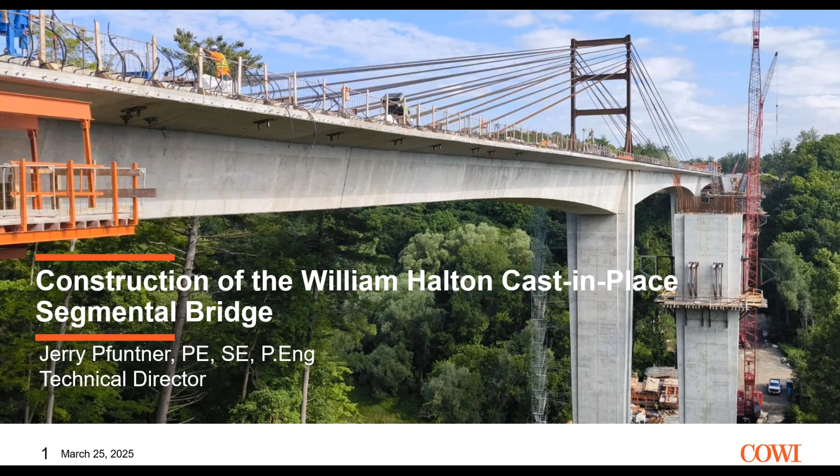All right, perfect. This afternoon we're going to talk about the construction of the William Halton cast-in-place segmental bridge. As you can see from the photo there, this is not your average cast-in-place segmental, with the temporary works that we have here. We'll discuss that over the presentation.

A little bit about the project. It's located in Oakville, Ontario, Canada, near Toronto, which is a suburb of that. It's part of the William Halton Parkway Extension Project, which is going to be completed in late 2025 this year. There are two new bridges over the 16-mile creek that you see below and to the left. It's got two lanes of traffic and pedestrian walkways, and it's going to help ease traffic in that rapidly growing area in Oakville, which is very nice.

The owner is the Halton region. The engineer of record for this structure is WSP Canada. The contractor that we've been working with great is Bot Construction, and COWI is the construction engineer on this project.

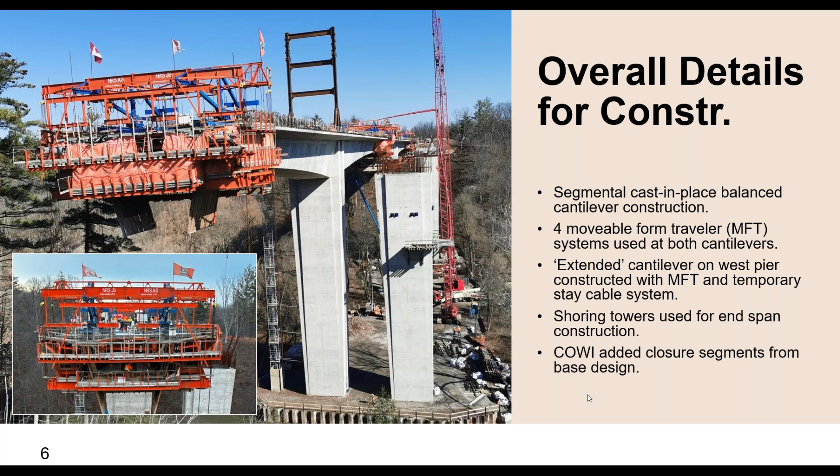Next we'll spend a couple slides talking about the construction methodology. Most of it was pretty standard cast-in-place segmental balanced cantilever. We have two pairs, or four travelers, one pair on each cantilever. We did have an extended cantilever on the west pier, which we'll be talking about extensively here, and shoring towers were used for the end span construction as is typical. We also added some closure segments from the base design to assist us with closing up and making our geometry adjustments right at the end of each cantilever.

So our sequence, pretty typical: pier tables were constructed first, and then we progressed on to the cantilever segments. On each cantilever, we closed up the midspan of the main span first, and then closed on to the backspan, and then we had the extended cantilever that you see here in orange, and then closed up with a closure segment onto the pier segment, the expansion segment there at the west abutment.

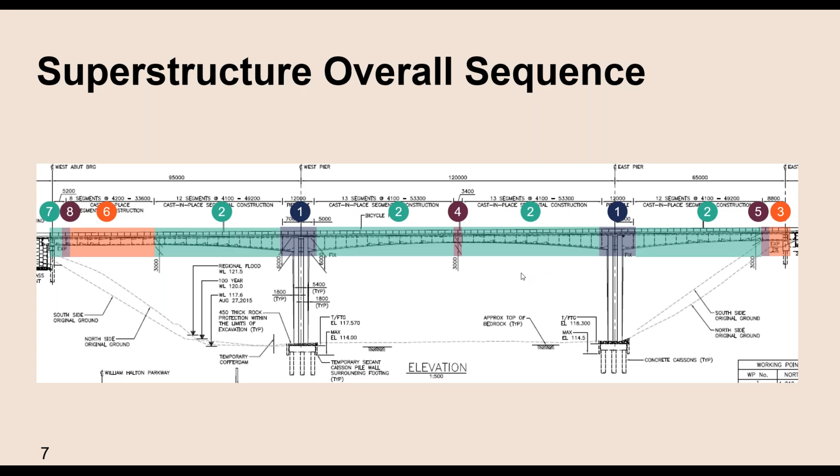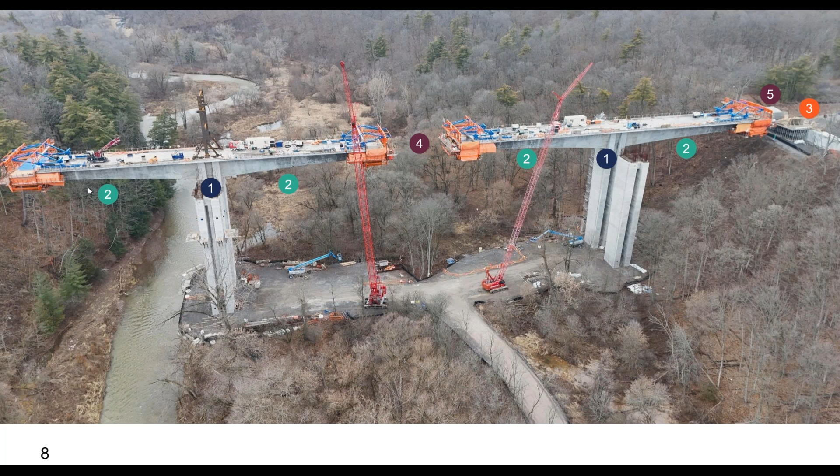This photograph just kind of highlights those different aspects of it. You can see access was not bad down below, being able to put cranes within an area. This pier ideally would have been located right where this creek is, in order to have a little bit better span distribution, but due to environmental restrictions it's not. So that's why we're talking about that extended cantilever that was required to get over here to the west abutment for the project.

Substructure was fairly typical. One thing we liked was seeing the twin pier columns that help with strength, but also with geometry control. It gives us a very stable pier table system to erect without a lot of movement of the substructure during cantilever erection, keeping it very stable as we progressed outward.

You can see they were integral piers at the top end of the pier table, with a pretty extensive formwork system for the pier table construction itself. That leads into the pier tables, which are nice and long to provide a platform for our form travelers, with extensive diaphragms as you typically would see, matching up to the twin pier columns supporting them in the substructure.

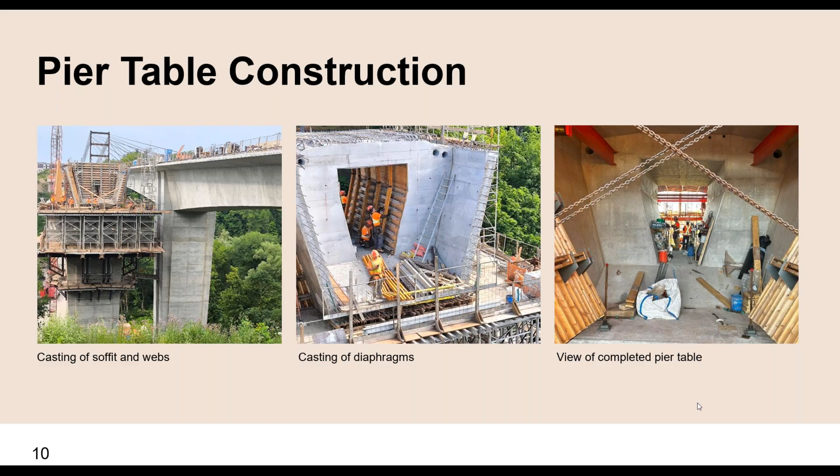Typical segments, our cycle was a little different than you would normally see. Typically you have a cantilever tendon for each segment, so from the pier table you'd stress a tendon to the first segment and then launch the traveler. Whereas in this configuration, the post-tensioning was one cantilever tendon for each pair of segments. That's doable, but it's a little slower for the erection cycle, since you have to wait for both segments to be cast and then stress the tendons before moving forward.

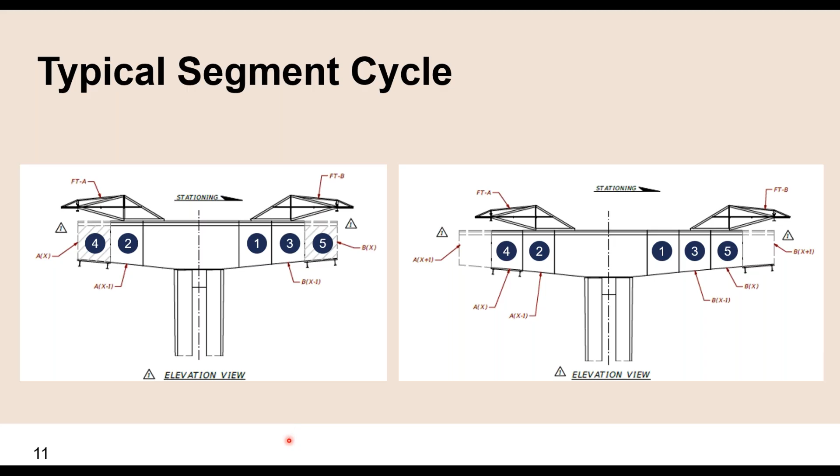Our typical cycle was to launch forward, set up the formwork as normal, do early morning geometry control, then set up and place the rebar, post-tensioning, and all those things typical of our segments, then cast the concrete once completed, and screed to the proper elevation through the segment.

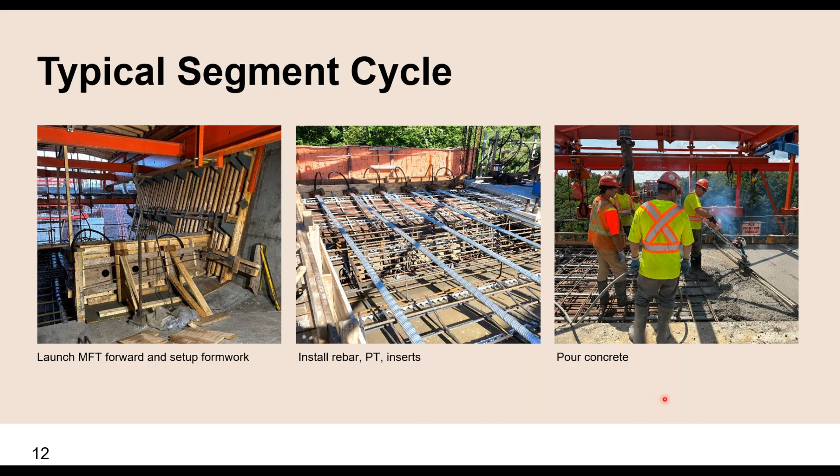The extended cantilever is where this project starts to get interesting. In order to have typical balanced cantilever construction with cantilever tendons all the way through to the midspan pour, to extend the cantilever the designer chose not to have cantilever post-tensioning integrated into the segment.

So beyond the typical balanced cantilever segments, we have no cantilever post-tensioning. All of the support for those additional segments is provided by this temporary stay system. It really acts as external post-tensioning, almost like a temporary extradosed bridge, in the way they actually performed and behaved.

By anchoring back and extending the tendons way above the level of the deck, we got the benefit of added eccentricity and support to go way beyond the typical range for balanced cantilever segments, anchoring them back into the completed backspan for the stay cable anchorage.

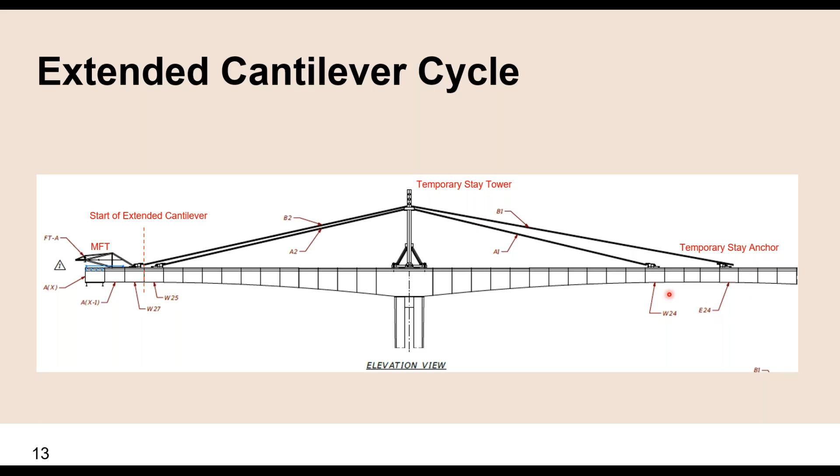This cycle was a little different. We were doing unidirectional form traveler construction. Once we got beyond there, we closed the backspan and the main span cantilever, which allowed us to complete the temporary tower and begin anchoring the stays into the backspan and main span, then anchoring them forward right behind the form traveler as we progressed onto that extended cantilever.

The anchorages, the boxes themselves, are at the beginning of each newly cast segment, so we end up adding some external PT bars above the deck level, mainly for shear lag effects for that segment. The anchor box was close to the edge so we'd provide some pre-compression close to where that anchorage zone was with this additional external post-tensioning.

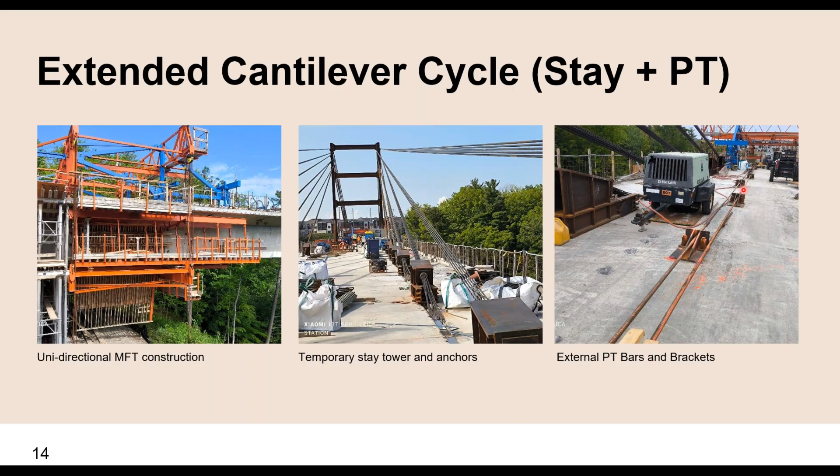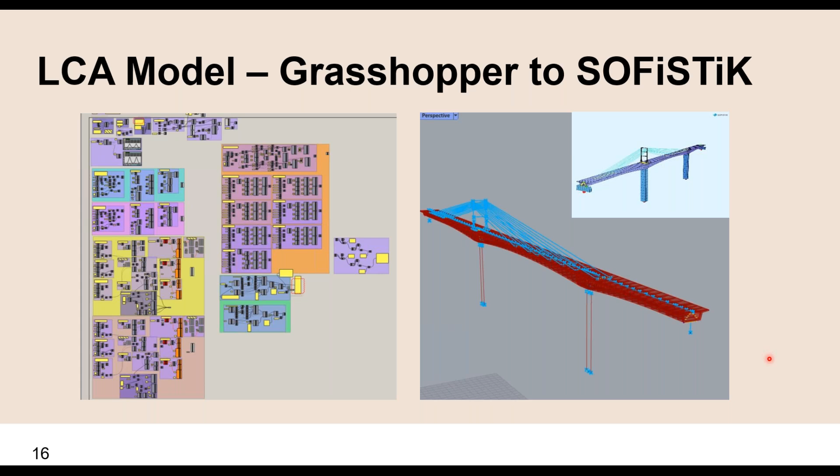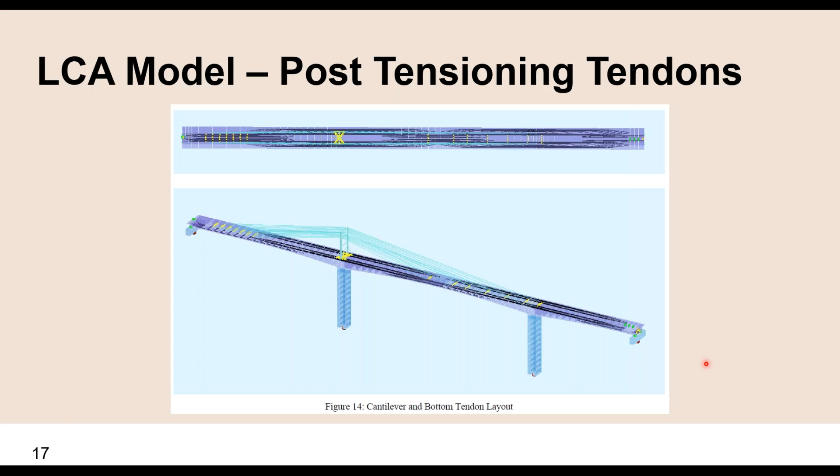Here you can see a good view of the varied post-tensioning systems within this structure. We have the typical cantilever tendons, our continuity tendons in the positive moment regions, and distinctly you'll see the cantilever tendons end right at the end of the balanced cantilever unit, with no cantilever tendons beyond this. We're strictly relying on the temporary extradosed cables to provide that support and those forces for the extended cantilever throughout construction.

In Canada, the CSA S6 is the predominant code that's required, but it doesn't directly address most of concrete segmental construction. So it's a blend of the Canadian CSA S6 code and also AASHTO, which they reference into their specifications for this project. We used a combination of AASHTO construction load combinations and the Canadian ones, incorporating design values and different loadings from AASHTO for things like construction equipment, wind uplift, and differential effects, where the Canadian code was silent. We had to do a few extra checks to make sure we satisfied both requirements on this project.

Our construction staging was set up to meet the requirements for geometry control and all the critical activities during cantilever construction.

We did make a few modifications. Some of the equipment, the traveler, was a little heavier than what was assumed in the design, so there were modifications for additional shear capacity required near the piers. We increased the top slab longitudinal rebar in the negative moment region, and we increased the top slab beyond where the stay cables were.

A lot of that was due to the fact that, as construction engineers working up in Canada, we considered that with the weather conditions there, we were not going to have bonded post-tensioning at all times. So we made sure we had the proper amount of additional reinforcement to make up for the fact that we couldn't count on additional stress gain in the cantilever tendons, because they were acting almost like external tendons. We also had the increase in loads during construction, and those shear lag effects I was mentioning earlier.

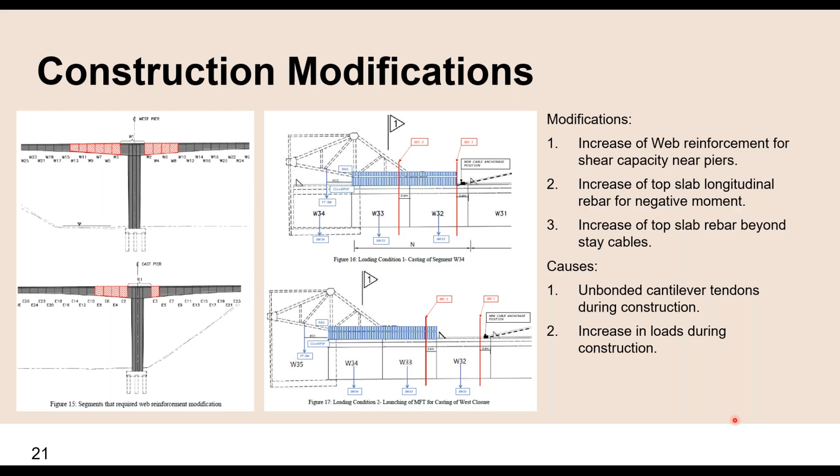For the temporary stays, we used nonlinear stay cable analysis that we can do within Sofistik. We generated our cable axial forces as part of the design in order to balance that extended cantilever. We were also looking at the negative moment region, the top slab stresses due to this negative bending, but actually the stay cables in certain stages would create some tensile zones in the bottom as well. So we were managing that back and forth, determining the axial force required for the temporary cables.

In the end, they were performing much like post-tensioning tendons. We were able to stress them to force, and they held their force, largely because the box girder section has a pretty stiff moment of inertia and stiffness associated with it.

So we didn't have the same concerns that you would have with a cable stay bridge, where we have a much more flexible structure. This one behaved very well as a bending element, and we were consistently able to generate these. We did end up stressing these up to 70%.

We were comfortable with that, given that the deflections during cantilever construction were small, and there wasn't much change in the work points between where the cables were during all phases of construction.

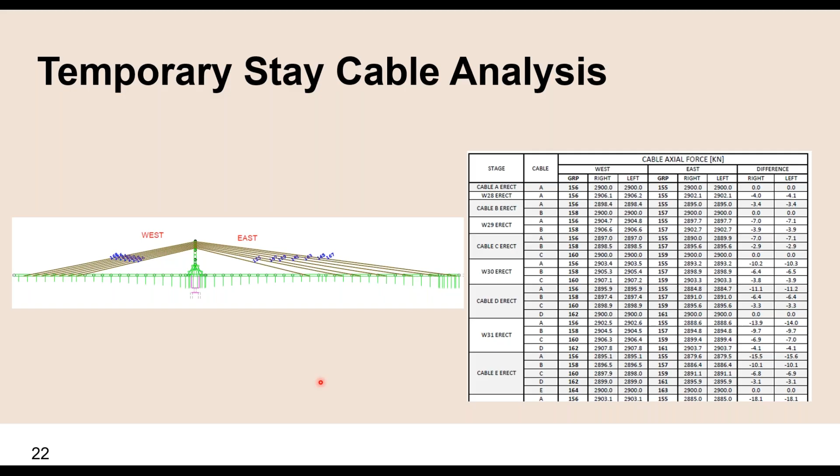Camber is where you can begin to see some pretty good differences between the traditional balanced cantilever and the extended cantilever. In regions where we were doing true balanced cantilever construction, the cambers were fairly consistent, what you'd normally see for a bridge of this size and magnitude. But when we get out to the extended cantilever, that's where you really see an increase in the bending.

This region with the extended cantilever is a constant depth box girder, and these deformations got to be pretty significant within the cambers themselves, even with the temporary external stay cables working within them. So we were dealing with some bigger numbers than we're typically seeing, and we'll discuss later the geometry and issues we had with keeping that all together on this project.

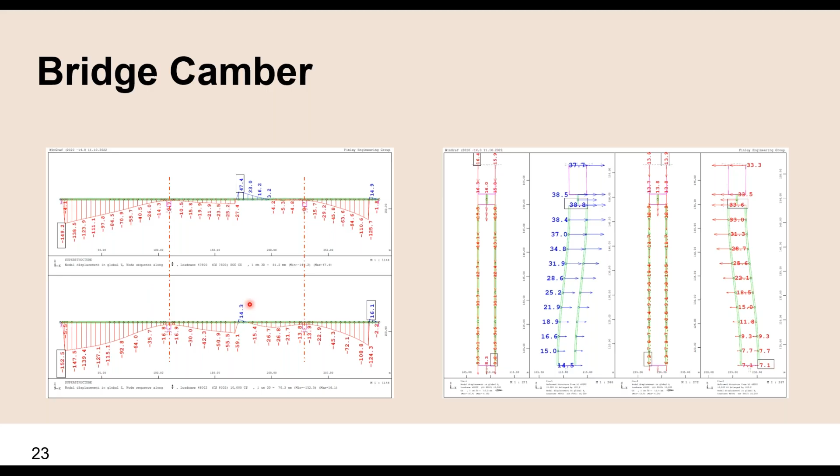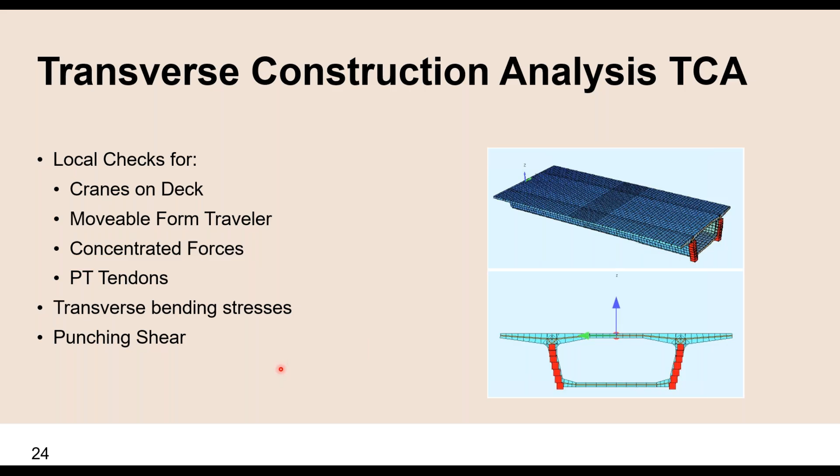Quickly, our transverse construction analysis. We had local checks - many cranes on the deck, the form traveler itself, concentrated forces from our cable anchorages, the post-tensioning, and the different items within the deck. A lot of that had to do with the cranes. We also had a Spyder boom crane to help with concrete placement out there.

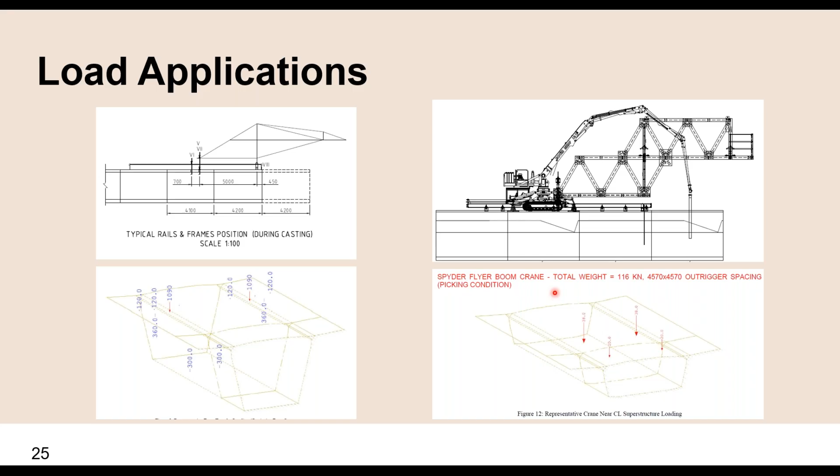Analyzing the local effects as you would typically do for a concrete segmental bridge, to analyze those during construction to make sure we were within and following the project requirements for allowable stress conditions.

Next, we'll start digging into some of the temporary works. The temporary stay tower really is what made it possible to have this extended cantilever.

As I noted earlier, the balanced cantilever part ends right about here. We're in a constant depth region that extended the cantilever all the way out to get to this west abutment. That was because we couldn't get into the creek that's back over here.

You can see that the temporary tower itself is extensive in order to get that number of segments. It's quite a structure itself - it's almost a shame to have to take it down, but it was necessary to help us get that.

It applies external axial forces for these regions that don't have cantilever post-tensioning tendons, so it's acting to provide an axial force as well as the bending moment required to resist the positive or negative bending component for these segments.

We did have a fixed connection of the temporary tower at the pier table itself. We did not have it truly pinned - we wanted to have the rigidity there. And then the stays actually greatly affected the geometry control under thermal loadings. We'll talk about that here in a second as well.

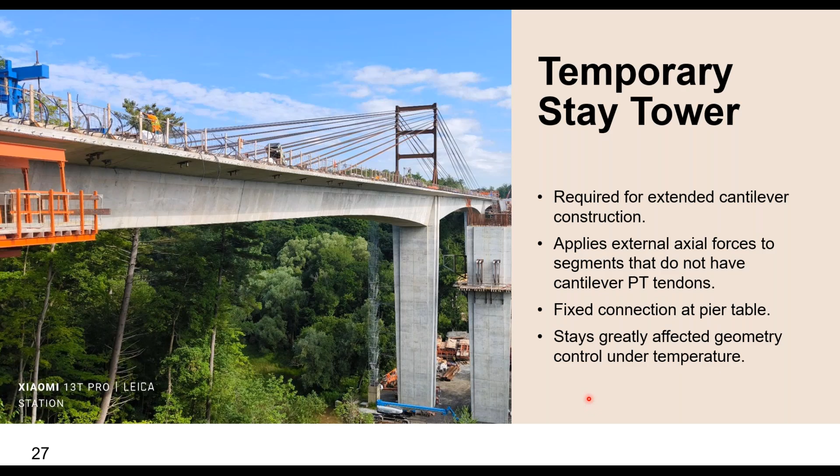For the temporary tower, we utilized 3D modeling to generate this and the details, integrating this into the shop drawings, as well as producing all the fabrication drawings for the tower directly off this 3D model - quite handy. It also helped create the installation manual that you see here, with the actual graphics used to describe how we're going to install this.

One of the things in the temporary tower is the first cables that were constructed. You can see we have a cable anchor box instead of saddles like we used for the remaining ones. This greatly helped us stabilize the tower for stressing all the remaining ones.

So I chose to have fixed anchorages on both sides, so we could stress a couple of strands at this bottom level, and that greatly stabilized the tower itself and allowed us to have just simple saddles for all the rest of them.

This eliminated the need for additional anchorages and installation procedures. So we were able to drape these right over the saddles, and it worked very well with that bottom stay cable acting almost as an anchor, as well as the stay system, providing stability to the tower itself.

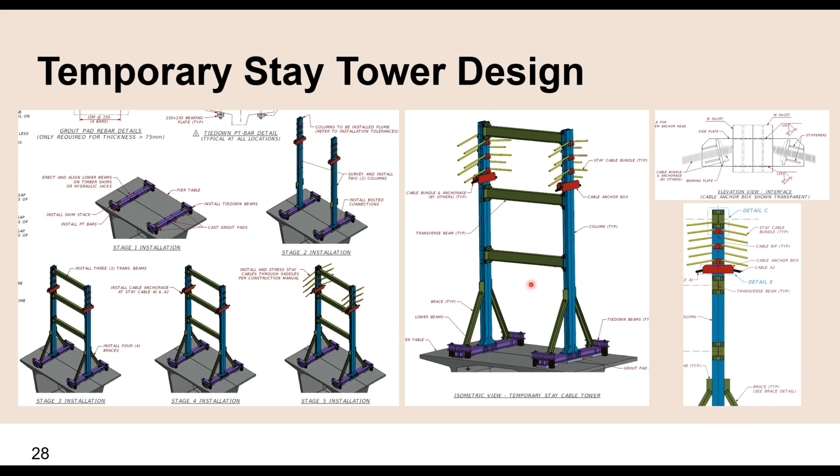So you can see there's a good view looking down the deck. You get a good feel for the stay cables themselves and how extensive the tower is.

The height was chosen to maximize our efficiency. We're able to keep these tendons down to 19 strands each, and then balance the height of this with the amount of complexity that we have within there.

So that gives you a good look down there, and you can also see a good view here of the anchor boxes that we actually had to do. If you ever wonder what it takes to mount a 19-strand tendon eccentric to a deck at that level, that's what it takes. It's quite a piece of steel to be able to transfer that safely to the box girder section and get those loads into it at that level. We'll describe why we had to do it at that height in just a second.

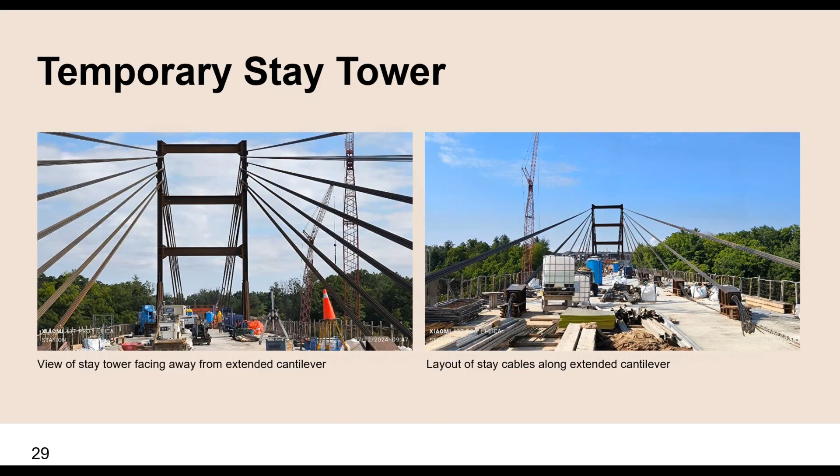The tower itself, as I mentioned, is fixed. We wanted that rigidity within the box, and we have a nice pier table to secure it to. So it's just on standard grout pads, and then we fastened it with tie downs from whaler beams down there directly, so that was a fairly efficient part of that system.

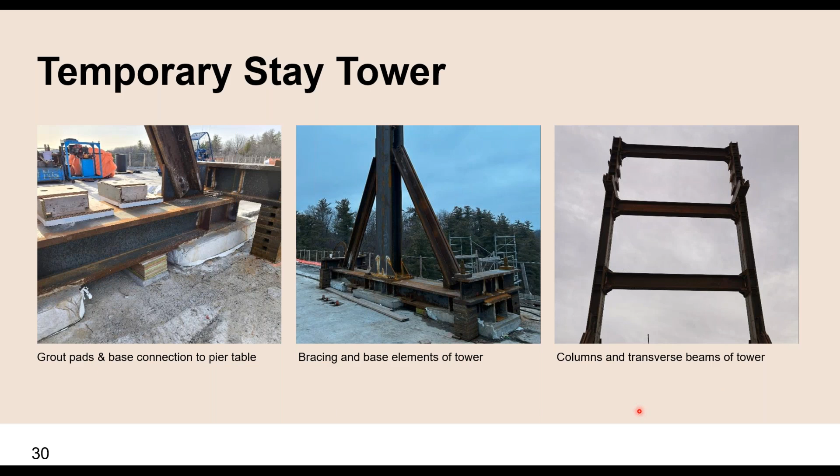All the hardware was standard post-tensioning, so we didn't have any stay cable details, even though we call them stays. They're just post-tensioning systems that were utilized within these boxes and the anchor system to be able to utilize that, so it's a fairly economical strand and anchorage system from that point of view.

So the first one was the anchor box, which was very stable. And then we utilized these saddle details: we just took pipe sections, cut them in half, then put a gusset cut plate on top of it, and we're able to run and drape the strand directly within this saddle in that confinement zone, and run those directly over the top, so that all stressing beyond the first one was to be accomplished from the level of the deck itself.

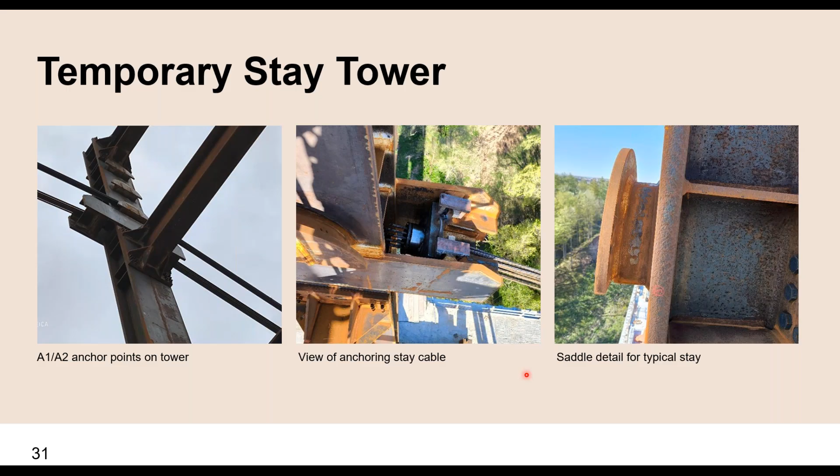One of the big things when you look at these types of details, running back-of-the-napkin kind of stuff, is that the devil's in the details. Part of what this requires is a block out, and when you actually take the stay cables at that inclination, the size of the block out is huge—almost an entire segment length.

And then you couple that with the detail being right there in that socket of the web, right where the form traveler would bear down. So you quickly run out of room for this detail.

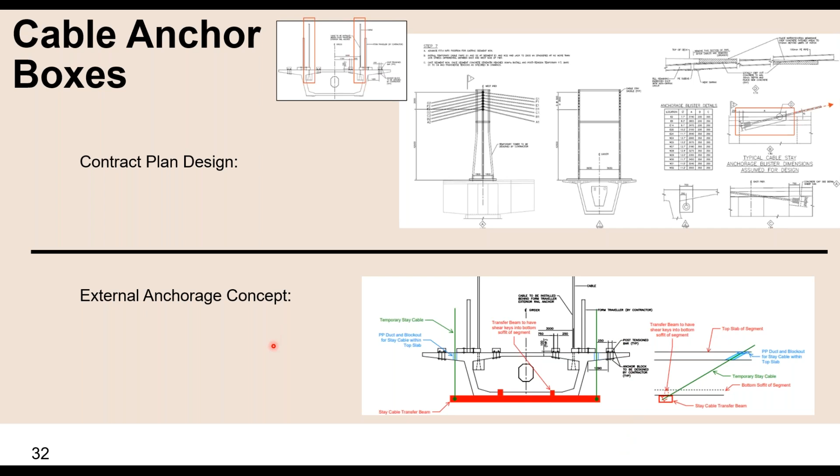So this cable box system was actually developed to be able to transfer the load of the stay cables within this region, and then get them down into the level of the box girder. We actually designed this with an eccentricity to the segment. There's a tie down within this region, and we have the bearing location here to form our couple to resist that. So the steel you see here is all about the transfer mechanism to get this anchorage force at an eccentricity, with the couple formed by the tie down and the compression zone.

Probably the biggest other issue is this all has to be done inside of the form traveler, between the rails that we have in there. So it's also got to go between the rails and has to be stressed between them as well. That created an extra deal, and that's why some of the height you see here is because we have to install and stress them in between the form traveler rails on the leading edge.

We'll show you some of the biggest parts of it here in a second. We have a lug down below that assists us with transferring this 19 strand load directly into the segment itself at a lower level. And then also a lot of clashes that had to be resolved as well.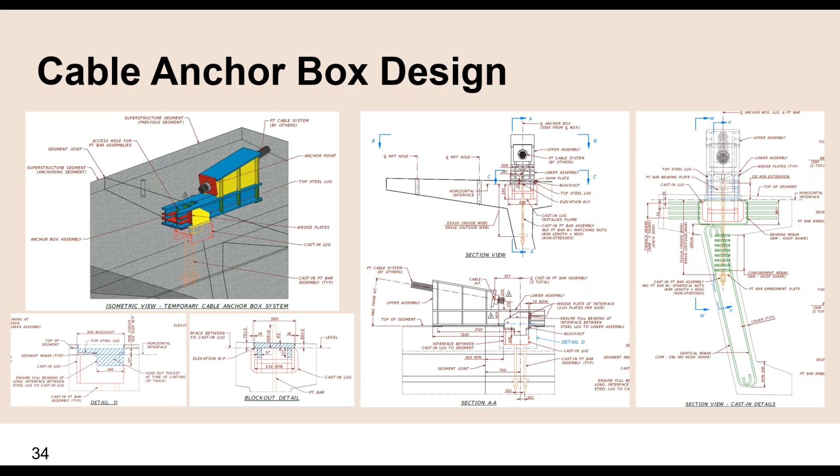There's a lot of equipment up top to be able to have that, but actually inside the box it's not that bad, which I think is a tribute to that part of the design. We have this cast-in lug developed to have the tie down within here, and all of the shear key that was developed actually transports that load into a bearing plate here. We integrated reinforcing to create almost like a spiral, a confinement zone, well ahead of that in order to get those forces from that anchorage above the level of the deck into the box with this level of detail. So not much into the box, but a whole lot out to make that eccentricity work within it.

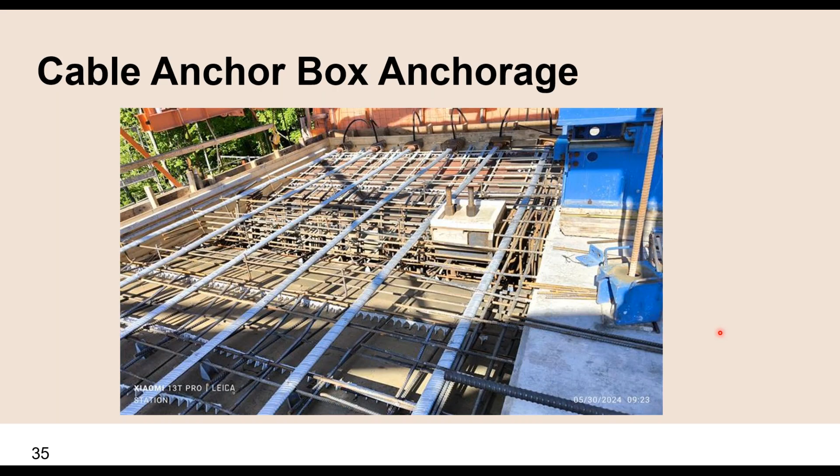But here you can see the extended cantilever. Each segment gets its own stay, replacing the impact of cantilever post-tensioning tendons out there. And here's a good view where you can see the anchor box is actually right in between those traveler rails. Here is a view of them, off the equipment, but this is where they're stressing in between the traveler rails themselves. There was a lot of coordination between the form traveler supplier and us to make sure we were comfortable being able to put that in there.

The height of this was actually selected to allow for the stressing to occur not only above the level of the deck, but also right there in the middle of the traveler. If something like this had to be done in the future, a little bit of post-tensioning that would allow us to advance this beyond and then stress behind would benefit in reducing the size and magnitude of this particular detail for the project.

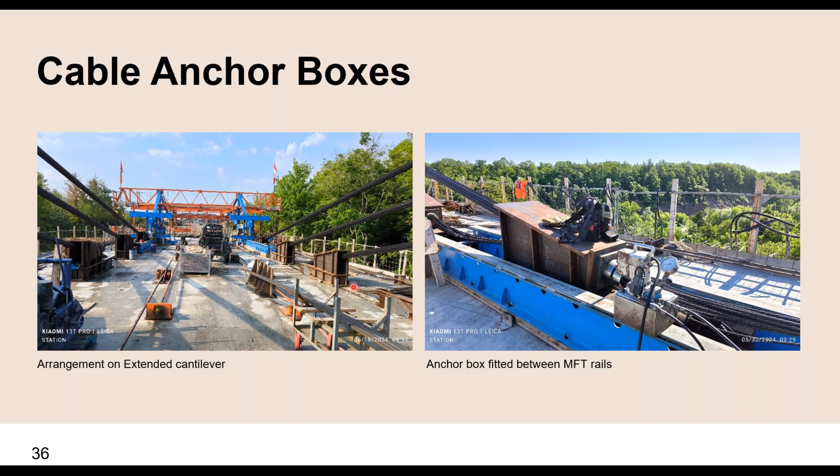Complex bridge engineering typically involves some tough work, and these guys are doing some tough work to install this in between the travelers in tight quarters. Again, this is where the 3D modeling really assisted us, making sure we could get the tools and equipment to tie this down inside the traveler rails and actually install all this stuff. This was quite an activity that had to be done to make sure we were all comfortable with it.

But in the end, it worked out. They're heavy, and what they had to do to install these was significant, but it all fit up and worked within the project to serve the purpose and need we had to make this happen on the top side of the deck.

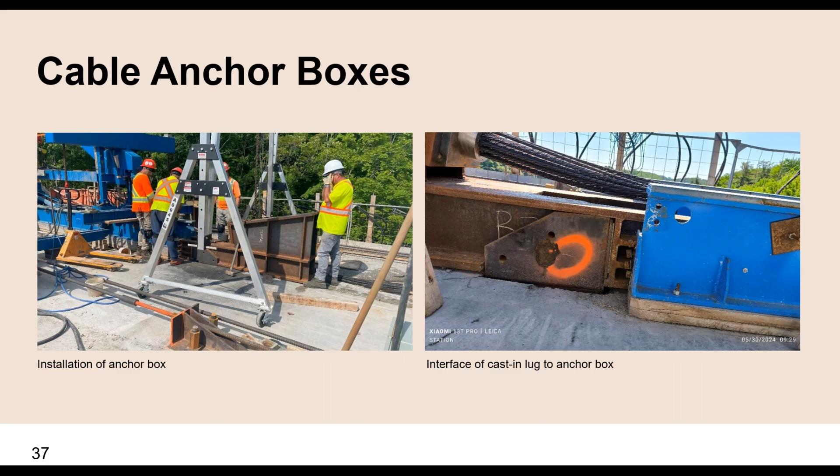Here you can see we stressed with a monostrand jack. We took advantage of the extradosed bridge concept, and the girders themselves had good stiffness, so we were able to stress these strand by strand, and the force ended up plus or minus 5%, which was not a problem. They stressed out very well, and they were able to install even the longest cables in about an hour and a half or so. So it wasn't really that demanding once they got everything in place. This particular part held very well, and the stay cables themselves did not have a lot of fluctuation in force throughout the construction sequencing.

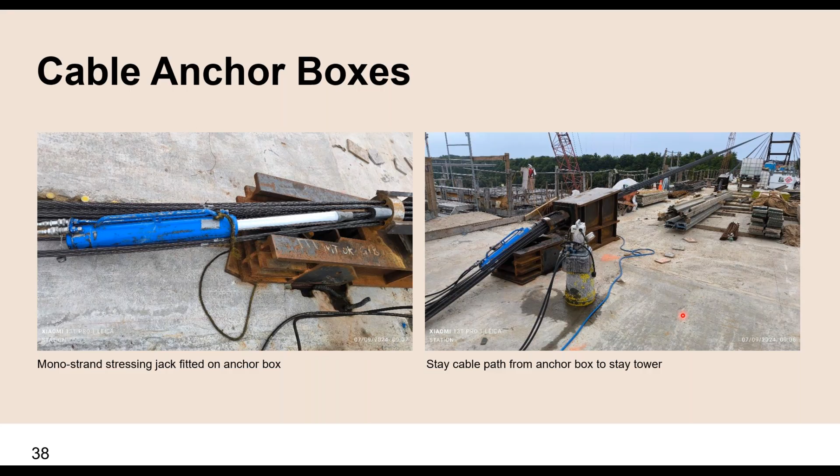Next, I'll talk a little bit about geometry control.

Typically for a cast-in-place segmental balanced cantilever, your first critical stage is the setup, where you're advancing the form traveler forward, then setting up, and after that an early morning survey to set the bulkhead for the next segment. After casting is when we do our after-cast survey and see what geometry was actually achieved. We're looking to make sure the angle break relationship between this new segment and the cantilever is in proper alignment, and then we make corrections as we go.

Bob did a very good job of casting all through this process, so we had good geometry to work with. But we did have the added nuance of the extended cantilever and adding external temporary stays as part of that sequencing.

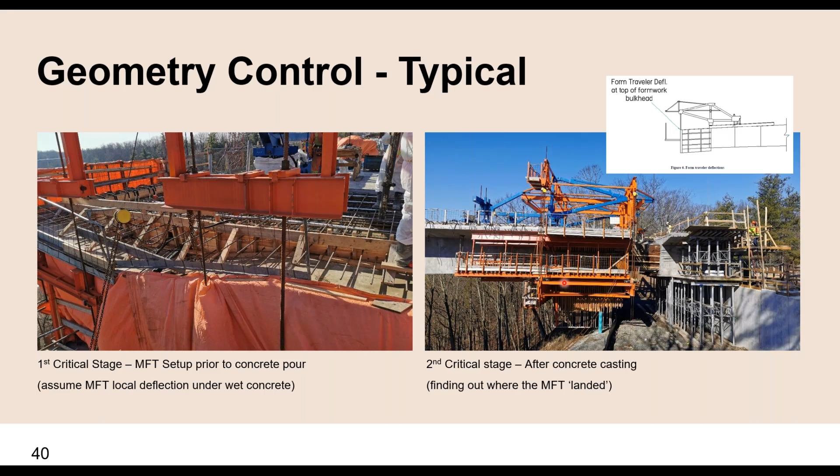So we developed this geometry control program, spreadsheet based, to incorporate all the different construction stages, cable installation, and setups after casts. Everything we talked about earlier in the stage construction analysis was incorporated within the software so we'd have displacements at any given phase and stage of construction, giving us theoretical elevations we could survey and compare against what we anticipated theoretically from the project site.

Now, the added complication of the stay cables - it was very easy to do all this when we were in typical balanced cantilever erection. But when we got to surveying and setting up segments with stay cables, it became much more interesting to add that whole activity, and the change in stay cable stressing was much different than what you'd have for a cantilever tendon.

We actually moved the bridge, and the external cables themselves would heat up during the day. A lot of the displacement we'd get from thermal effects, about two-thirds of the movement on a given daily cycle, was from the actual segment heating up and curling down like we'd normally see. But we also had to add in the heating up of the stay cables themselves, which accounted for about 25 to 30% of the delta we would see.

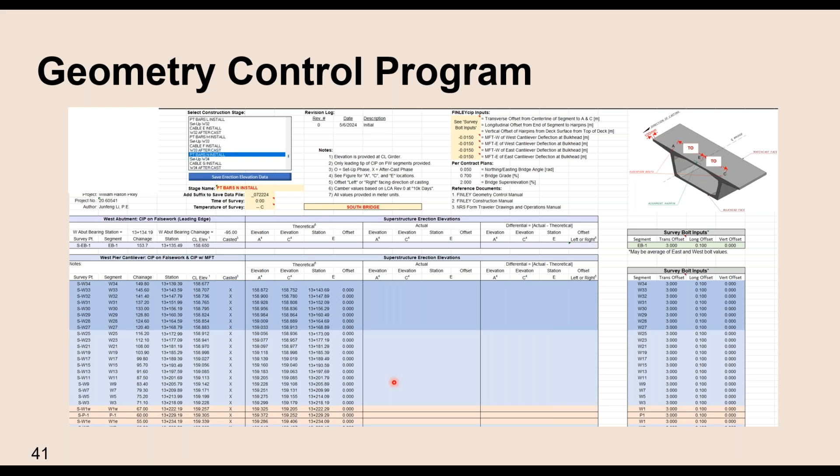I always say that geometry control is 25% art, 75% science. Part of it is looking at the bridge and understanding that we don't have everything in our models, then factoring in environmental conditions and loadings to make decisions to get the proper geometry. That's critical. So we learned a lot as far as geometry control.

Thermal effects became a big factor for the extended cantilevers. As we got out to the extended cantilever portion, we started monitoring temperature not only at first light but also taking afternoon surveys, gathering all that information. We wanted to know exactly how much the bridge was moving during the day, tracking thermal displacements versus ambient temperature, so we'd have an estimate of where we'd be at the end of that extended cantilever relative to where we started, and incorporate it into our theoretical numbers with thermal corrections as needed.

An interesting thing in Canada at the time: spring lasts about 3 weeks, then summer lasts about 3 weeks. We closed right in the middle of that transition from spring to summer. All throughout the late winter months, they promised me this bridge would never see more than 25 to 27 degrees Celsius. But we ended up having one of the hottest summers, with some pretty significant swings. At W32 we were at 22 degrees C, about a comfortable 75 degrees to us. Two segments later, we were in the 90s.

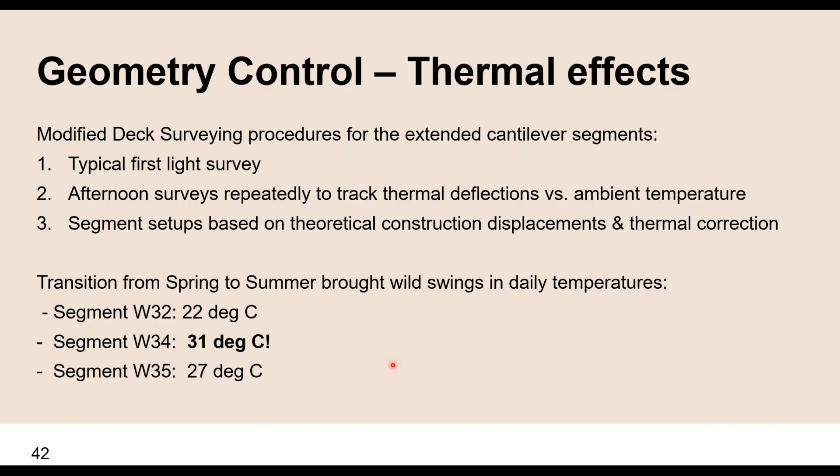We were able to use that early information to make judgments as we were casting segments 32, 33, 34, 35, and coming into closure to bring this thing home without needing a single stay correction or adjustment - just minor corrections as we came into final closure. We closed with just a minor geometry adjustment using the traveler, without needing a strong back or additional jacking. All that effort we put into understanding it paid off very well to close on that final segment with very good geometry.

As you can see here, it's a good looking bridge with that extended cantilever system itself.

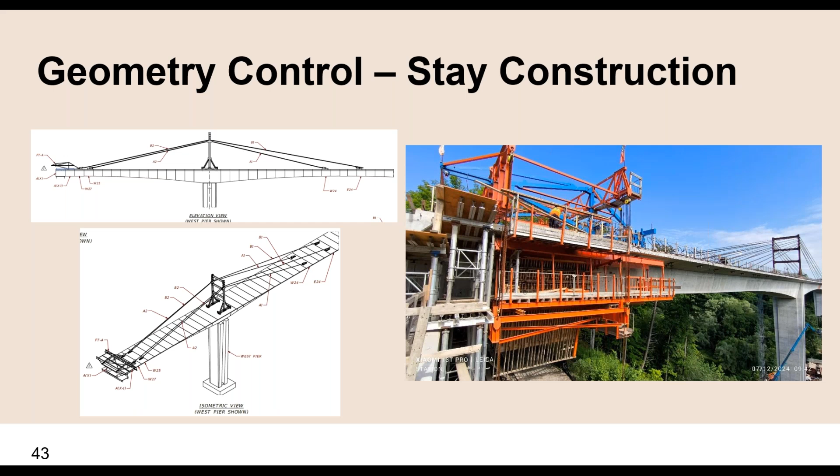A quick look at our closures. With good geometry control and the monitoring we had, we were able to close with very minimal counterweighting or adjustments in these processes. The closures themselves worked out very well to incorporate the deck and close on the cantilever, using the form traveler itself - we would launch forward, grip onto the adjacent cantilever, and make our minor corrections.

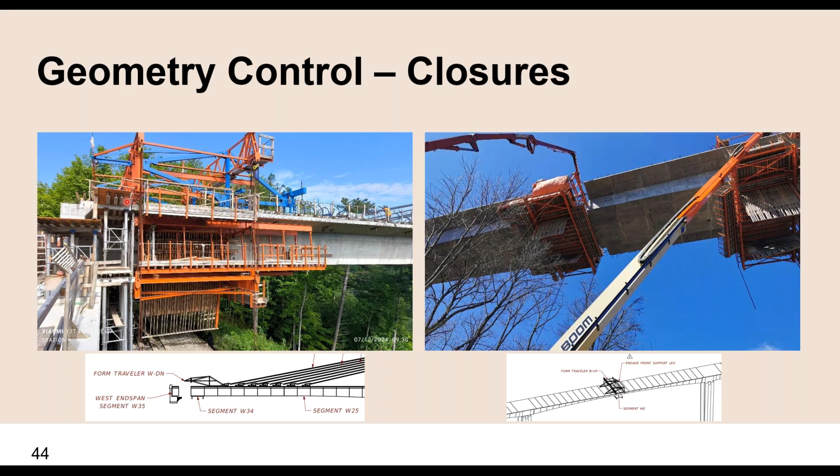All closures we're able to do with a simple post detail that we had on the front of the traveler, to be able to make those adjustments and then incorporate those into the final casting to have a very good geometry system within there.

Our current project status, this is where we're at. Last year we finished up the bridge you can see on the far end, that's the one I've been showing you all the pictures of. This is a recent photograph.

BOT has actually been doing very well casting in the wintertime, so most of the segments you see out there are wintertime casts. They're looking forward to coming into spring and finishing up these cantilevers, doing the same process we did for the left-hand side bridge on that right-hand bridge up on the upper side.

A couple of quick lessons learned. The extended cantilever was quite the detail - that's what made this probably the most complicated CIP segmental I've ever done. The external temporary post-tensioning system is definitely a feasible method for extending the cantilever length, as we had to do to get over that creek and keep the pier outside. But I will say it's an expensive alternative.

Having the additional details with the anchor boxes took extra time and measures - it was slow progress for many of the segments, especially the couple of early ones. They were able to achieve about a week and a half or so per segment at the end, but that was slow going at the beginning.

The other big one is developing a geometry control plan that incorporates those thermal displacements, taking what we've traditionally done with our spreadsheet geometry. We've done balanced cantilevers many times like this, but incorporating the stay system - we drew from our cable stay geometry experience and combined that with what we'd use for cast in place balanced cantilever, blending the two together.

I can't emphasize enough the ability to incorporate early morning and afternoon surveys, understanding the behavior of the bridge and how the temporary stays affected us - that paid off to be able to understand our bridge. By the last 2 or 3 segments, we were able to work with the wild temperature swings we had and develop a good plan to close this up without having to do very much at all to get to final closure and have a good geometry structure.

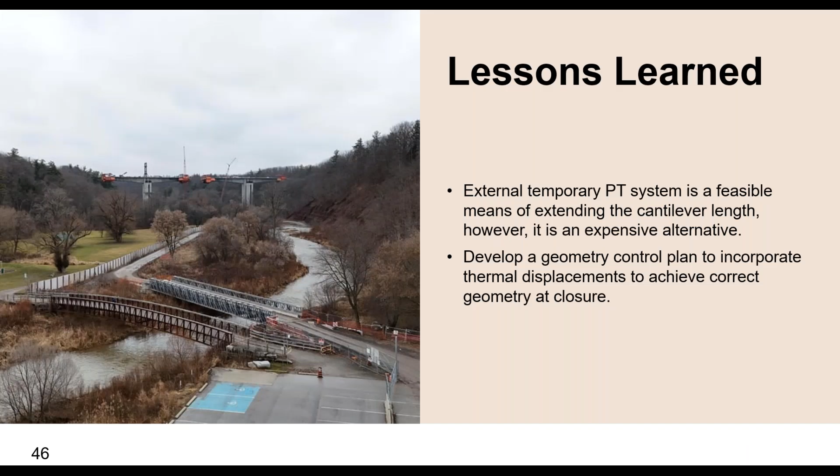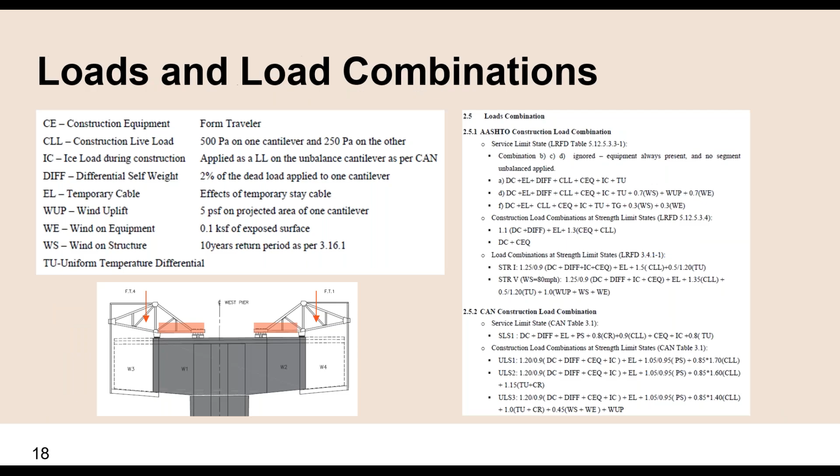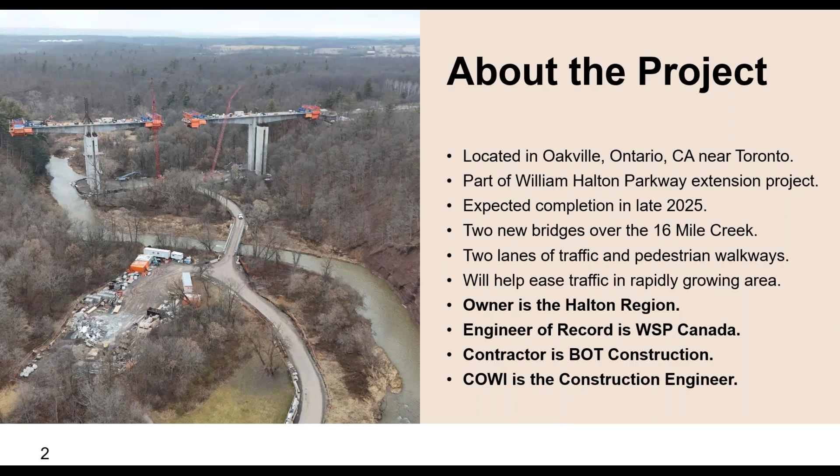Okay, how many total segments were there for the project? I've got it in my - sorry, I'm having to flip through here. I think there was like 58 per side. Apologize to everybody for flipping through. No problem. Yeah, 58 cast in place segments, 2 end span sections, a couple of pier tables, and your 3 closures.

And do you have a sense of what the typical cantilever cycle took in terms of number of working days, especially with the extra time needed for the stay cable work? Well, because of the cantilever tendon going all the way across between the 2 segments, the cycle is more in the 2-week range.

And what was the reason for that particular tendon layout? That's a little bit unusual for cast in place segmental. It is, and that was the designer's choice.

Was there a consideration of using lightweight concrete to reduce the added load on the end of the extended cantilever? The submitter noted that's been done on some bridges in Norway where the span configuration was not ideal. Yeah, if you look at this job, lightweight concrete could be something that could be utilized, but the big number is right here, 8 segments in this extended cantilever.

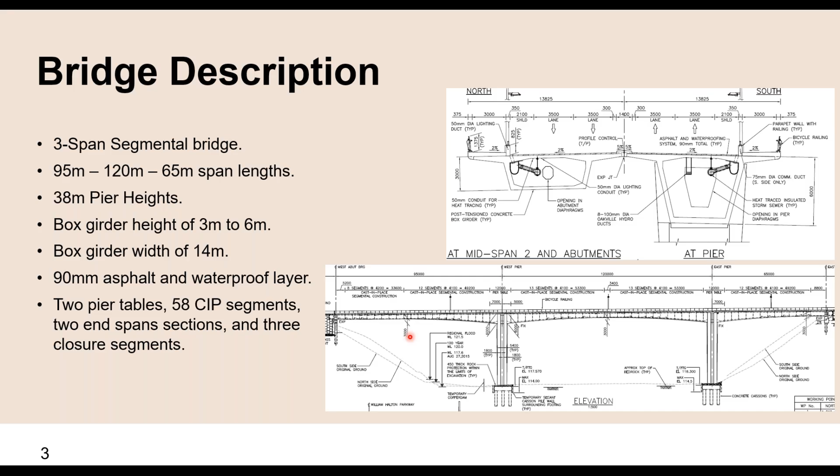And what was the final allowable tensile stress, the longitudinal tensile stress in the superstructure, in the service condition? So in Canada - let me get to that slide here.

And then depending on where you're at with the project, you can have, similar to our 3 square root, but you have to provide mild reinforcing to make up the difference, and a little bit more extensive than what we have in our US code. So it's close to what we have, but the requirements for rebar when you go into tension is a little bit different than with the CSA S6. And then compression allowables are very similar to what we have in the United States as well.